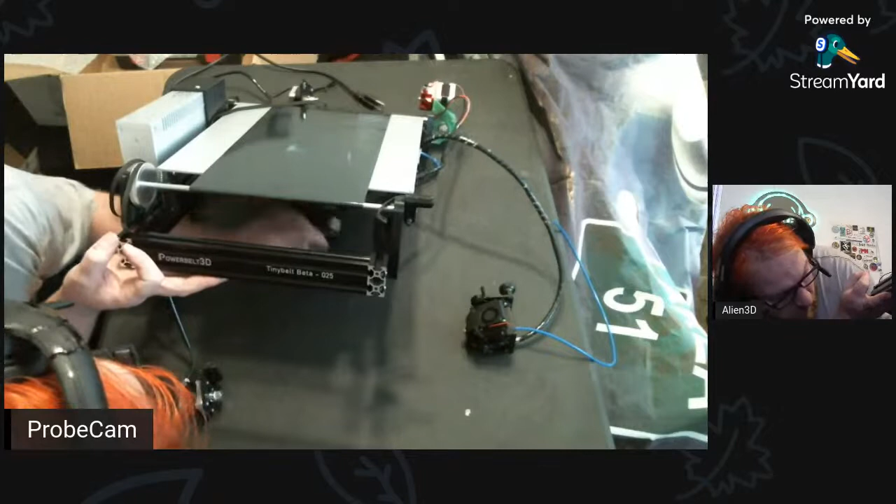There's the USB cable, here's the LCD screen. Is that the nut and bolt I just said I needed and apparently wanted to lose? Alright, where's the... again, I'm guessing this is the cable for the LCD. Oh, my cookies.

Alright, make sure there's no other connectors loose down here. And I have to make sure that I plugged the extruder motor and the Y motor in correctly. Or X motor, is that the X? So it's like X, Z, Y now, right? I'm assuming.

Yeah, Fernando's been kicking ass at the projects for real. I don't know where I'd be without him right now because y'all know I've been stressing and going crazy lately. Oh wait, I gotta rewind the video, he went ahead of me.

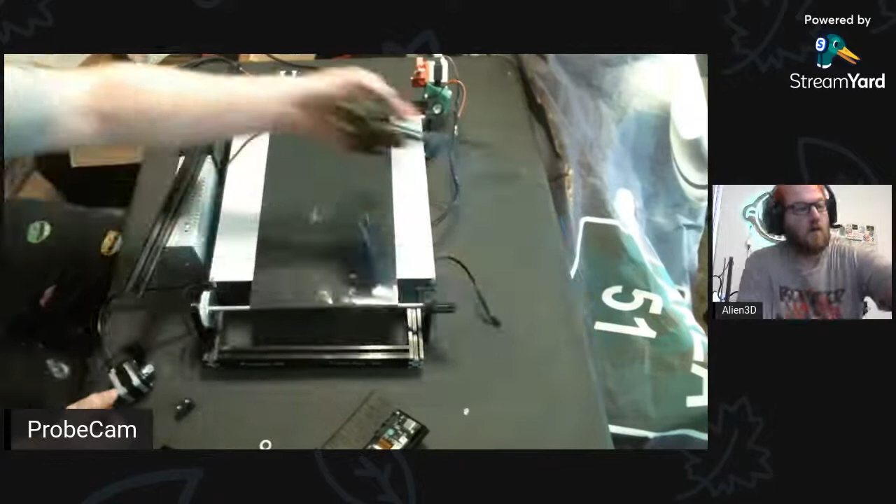So this is a replacement part that I'm including so that if the hotend mount... oh, okay, this is just a replacement part. Don't need that right now then.

So the most complex part of this whole assembly process is going to be our Y-axis, which is also where the hot... I do have a question for y'all, and this is something I brought up to Adam earlier. What's up Raziel, long time no see.

Let me see how he's putting it. Alright, so he's got a couple parts here that the idlers, that the belts idle on, and he's using smooth idlers, which probably isn't a problem to be honest with you, but they're on the teeth side of the belt.

Hey, what's up Rover? Do you guys think... oh man, I'm an idiot, I need a shorter M5 because this is going to be a problem. Do you guys think the teeth side of a belt would cause any artifacts in the prints?

Being on a smooth idler? Because I actually, when I was researching stuff for the Tesseract, I had come across an article that it could possibly put artifacts in the prints, but I don't know. Alright, M5s.

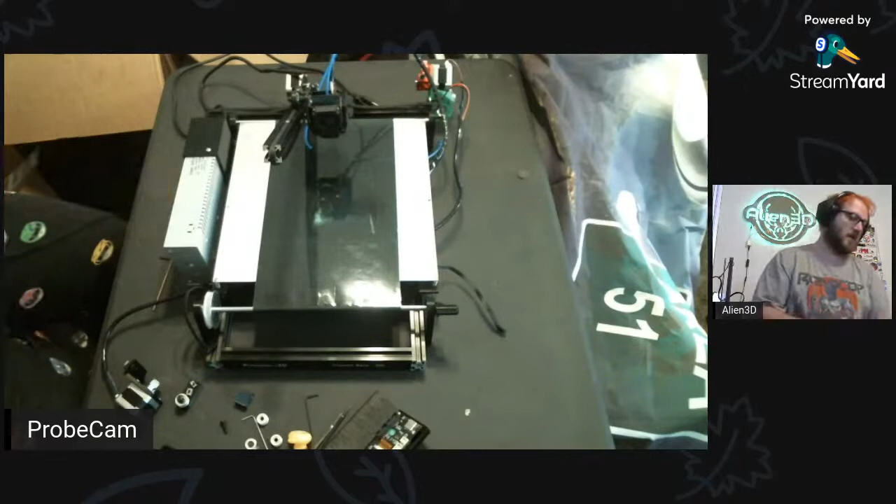I don't... oh well, that should be fine. And I think this goes over here. I don't have enough belt, I'm gonna have to loosen that up to make it.

Adam, I promise I'm watching your instructions, partially. Alright. I'm sure he said in his video how far this is supposed to go down, but I'm a doofus and can't hear.

Oh shoot, I dropped my Allen key, that thing's lost forever now. Is Adam in here? I saw somebody tagged PowerBelt. I found it.

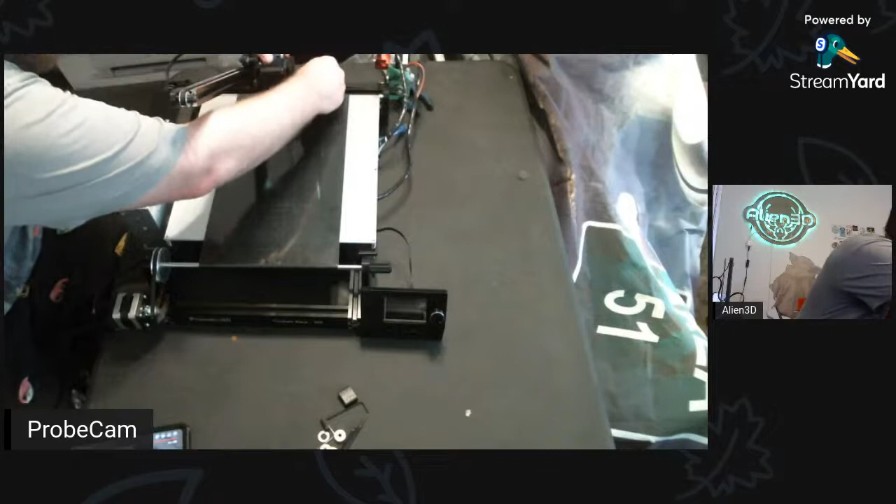Should probably pay attention to this spot. We can move the hot end assembly down to the end stop, and it looks like we're still probably 10 or so millimeters away from touching the conveyor belt, so we'll just repeat this process.

How close am I supposed to be to the belt? Looking pretty good, it looks like it's just barely touching, so we will start there to test prints and probably fine tune it. I can tighten the belt up too, if it's needed.

Booyah, I need power, so much for watching. Thank you so much for making the video, Adam. I had to watch it, otherwise I wouldn't know what the heck I was doing.

Alright, I have a power cord here somewhere. Something's plugged into it though, I can't remember what. Oh yeah, my silhouette. So I tried making stickers for the February UFO myself using the silhouette and my laser printer, and I didn't like how it came out.

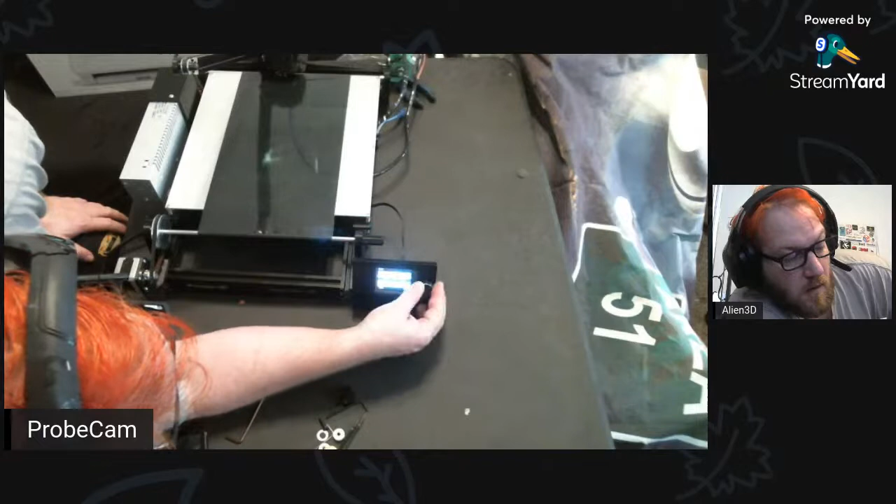Movement. What? Uh-oh. Uh-oh, Biscottio. Well, it hit the end stop, but it didn't stop.

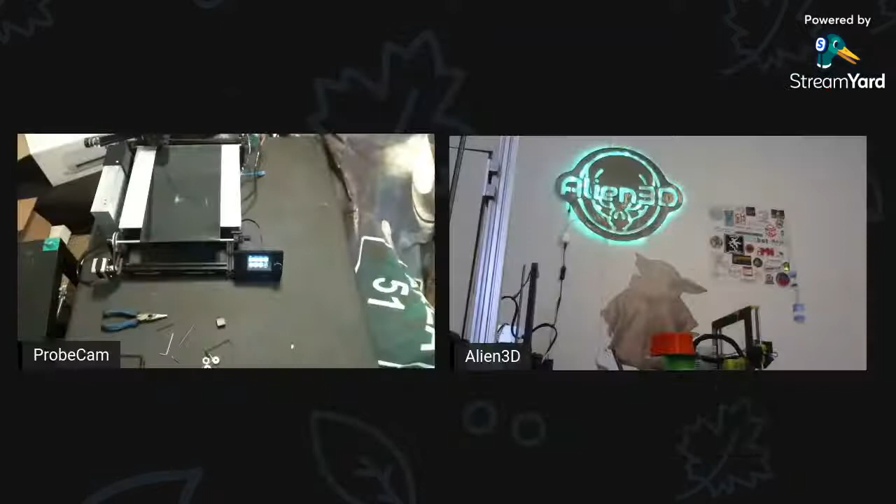Sound good? Sounds good. You want to make the thing go burr? Working on it now. Hey, I'm impressed with myself. I got this thing together and about to print in just over an hour. And a lot of that was just me BSing with y'all, so.

Oh, I need filament. We're gonna do what I do. The only use for my Sidewinder nowadays, I use it as a filament spool holder for my Prusa. Yep.

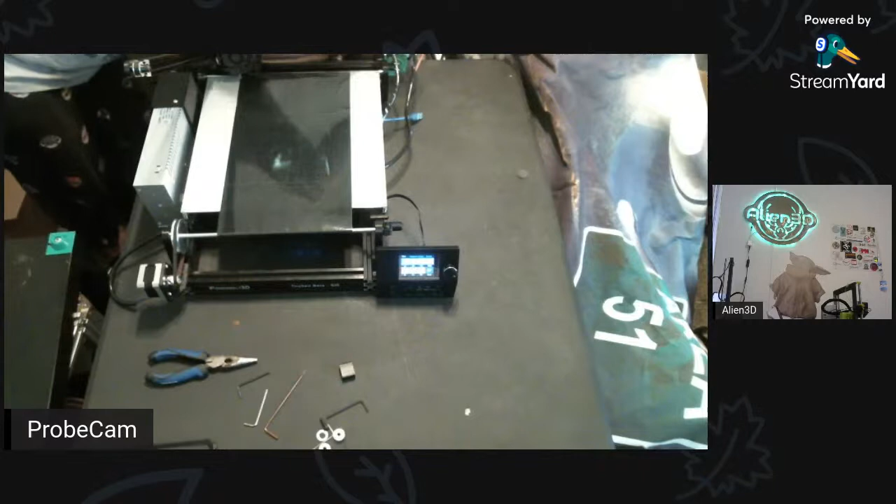Get in the hole, man. Oh shit, I can't see chat now. Hang on, boys and girls. Cap tubes.

Oh, let me go fix chat. What's up, Canadian Maker Project? Yes, I got a PowerBelt.

I shouldn't need my keyboard, but I might need my mouse. We'll see.

Adam's probably like, what the hell did I get myself into with this alien guy? Obviously, you have never seen an alien stream. It's always crazy. All right, let's see. We're gonna move Y.

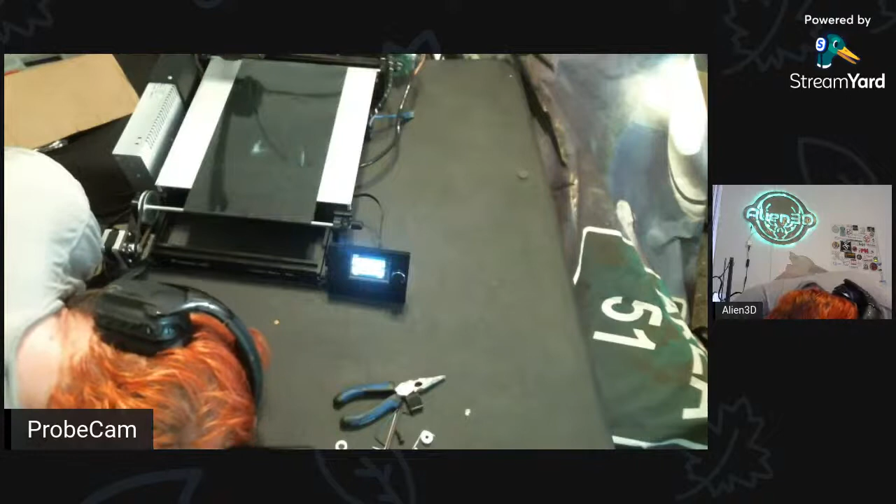Making progress here. This is how I judge printers, how fast their beds heat up. What kind of bed are you using in this? I should have looked. Is it a PCB bed?

I bet it could make pancakes. Yeah, I want pancakes. I think I have some pancake batter actually.

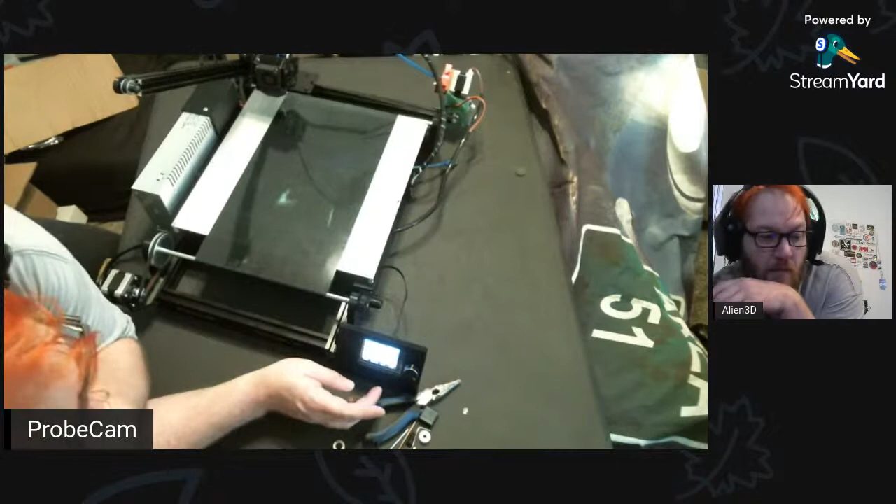Alright, waiting on the bed to heat. Hopefully this G code has home in it. I actually did a test print one time with pre-loaded G code, and it did not home. It started printing in the middle of the air.

Oh, I got PETG spider webs on me. Do do do do do do do.

Y'all excited? We're about to have our first print. And try to get the whole printer in the camera. Doom, doom, doo, doo, doo, doom, doom.

Hey, Vishal. Is that the Vishal from the new filament company, Spark 3D, if I remember correctly? Forgive me if I did not remember that correctly. Sliceworks. Why did I say Spark? Sliceworks. Sheesh. My brain is so fried. I was way off.

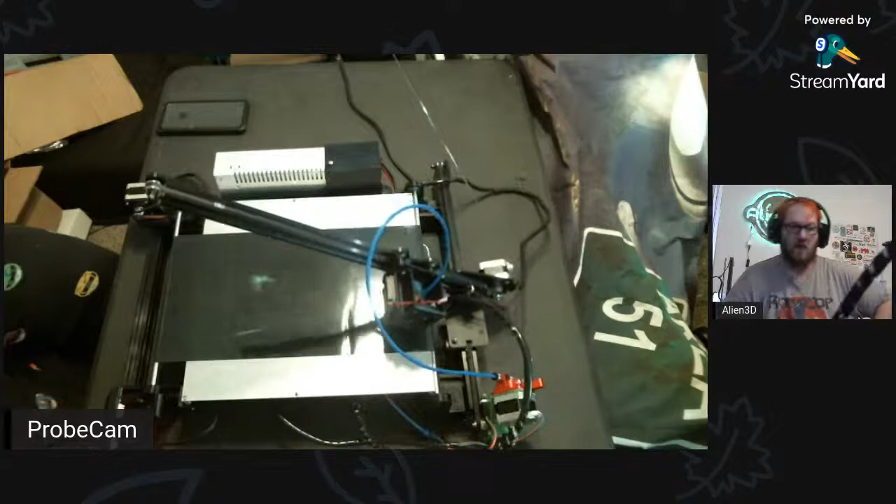Back, back. Yay! Yay! Yay! Now what's it doing? Oh no! That's not gonna work. Stop.

That's definitely not gonna work. We're gonna have to slice. Let's home, back, home, X. What the?

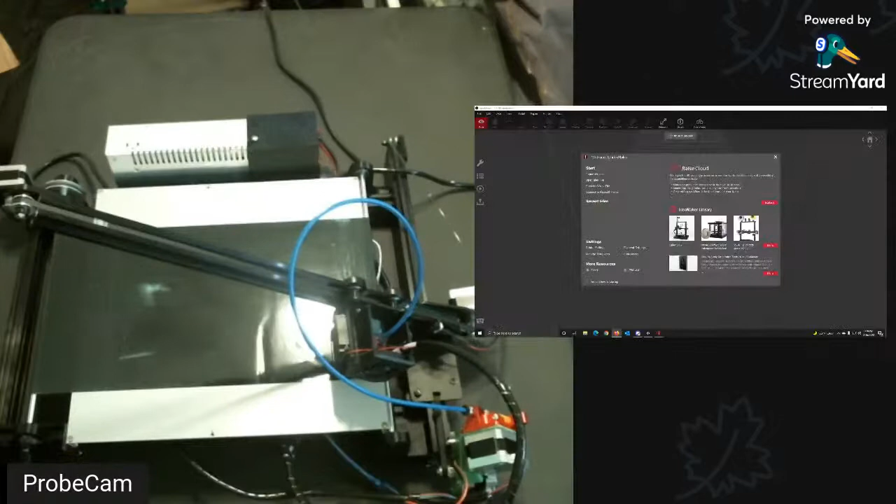No, I'm sorry, the bed wasn't going to 265. The bed was going to 65, but it errored out at 57. And then the pre-sliced G-code for this cube didn't have the start offset correct, so we're going to have to redo this one.

Let's find, anybody know a quick STL that can print fairly quickly? Let's do a quick test cube.

That's kind of cool.

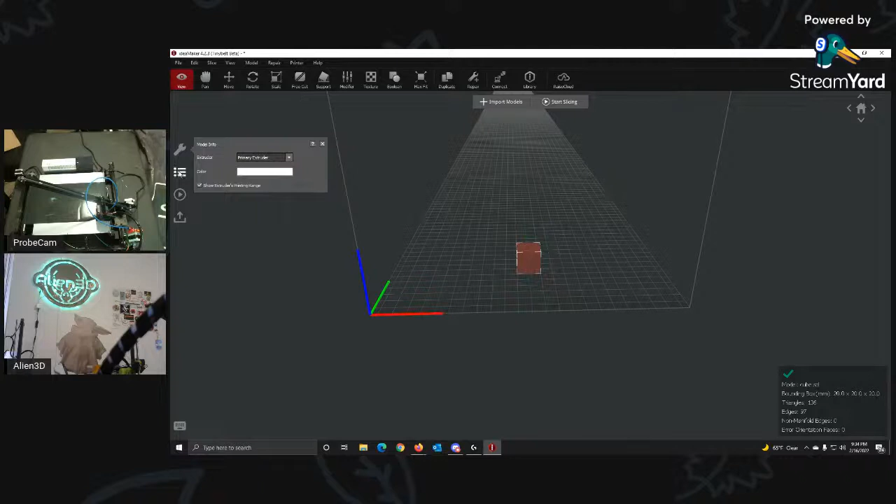All right, extruder, advanced, save. Where is... I just want to put, wait, why can't I move? Does that even matter where that is? Probably not.

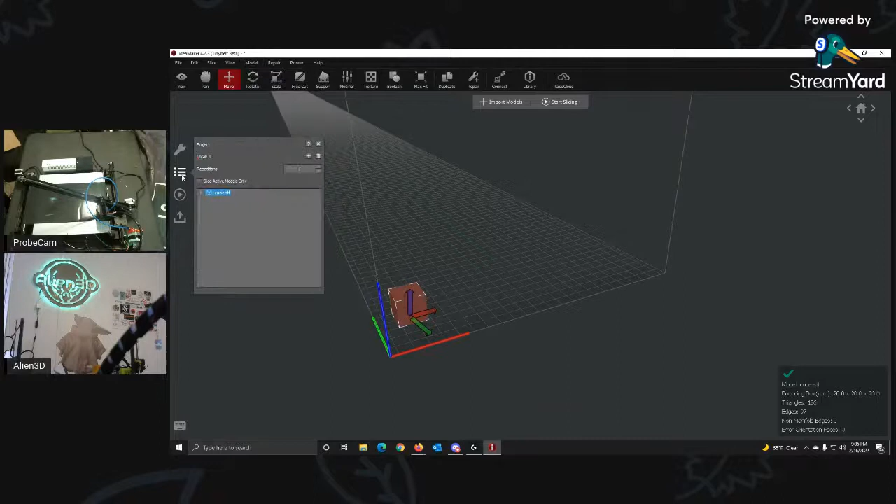Where are the filament settings? When you've been working in Prusa Slicer forever, it's... that's nice, that's nice. Temps.

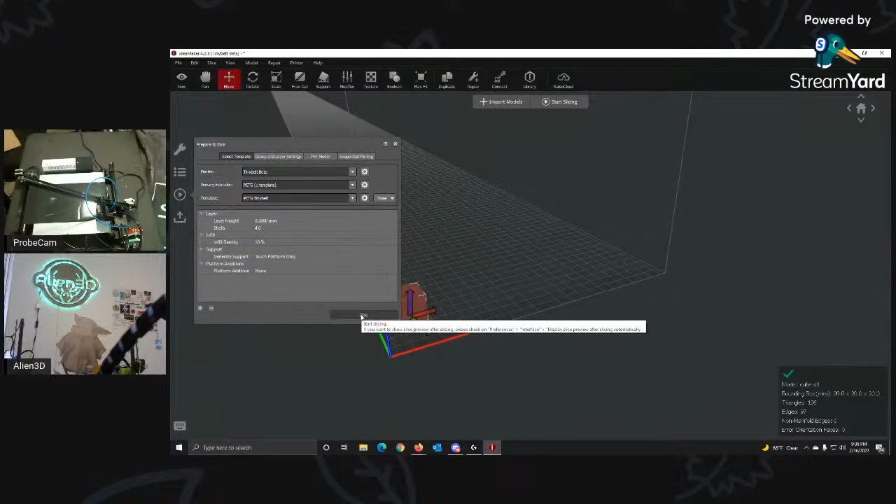Hopefully PETG will print and stick at 50. Eject. All right, let's try this again.

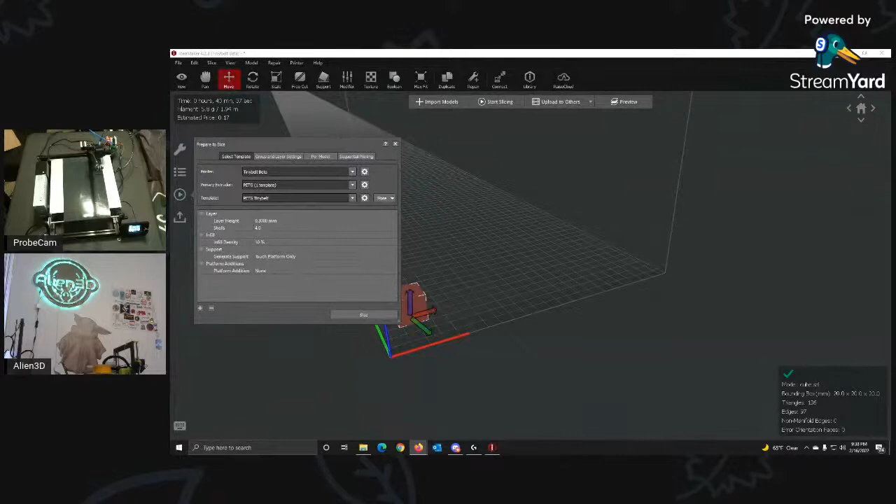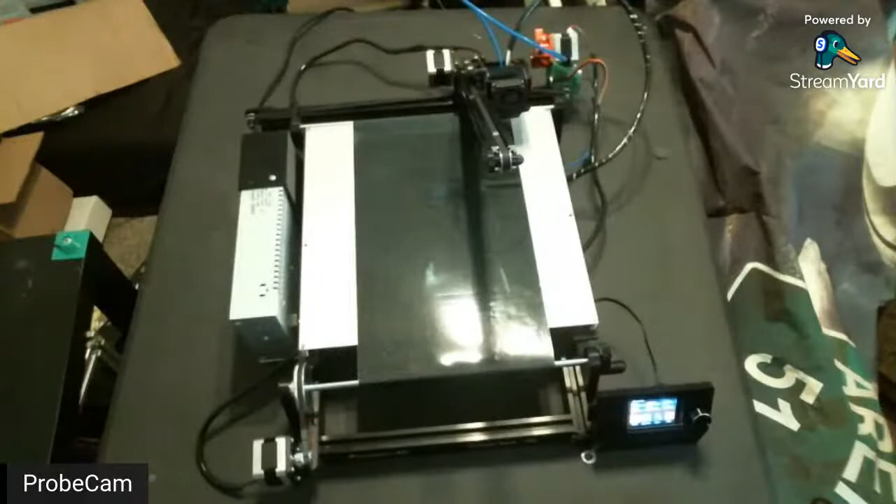Yeah, probably. I'm gonna message him though. I guess theoretically I could move the belt, but that was off kind of far.

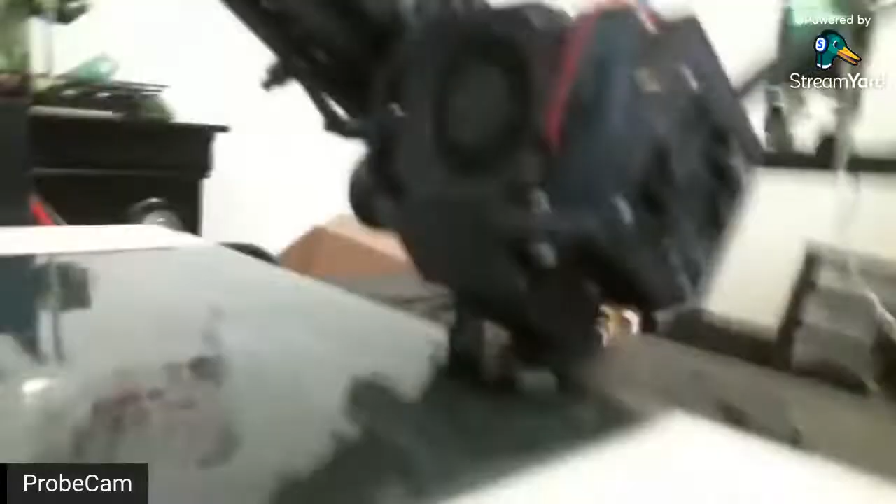I mean, it's possible that it was a nozzle clean. So that's a good possibility. But I like my nozzle cleans being on the bed as well, because otherwise it'll just stick to the nozzle since it's not going to stick to the aluminum. And then it'll cause a booger on the print.

I like that I can... oh, I need to turn off that autofocus. Oh, I don't think I can because I redid my hard drive and I don't think I installed the software. Sorry for the blur, guys and girls and aliens.

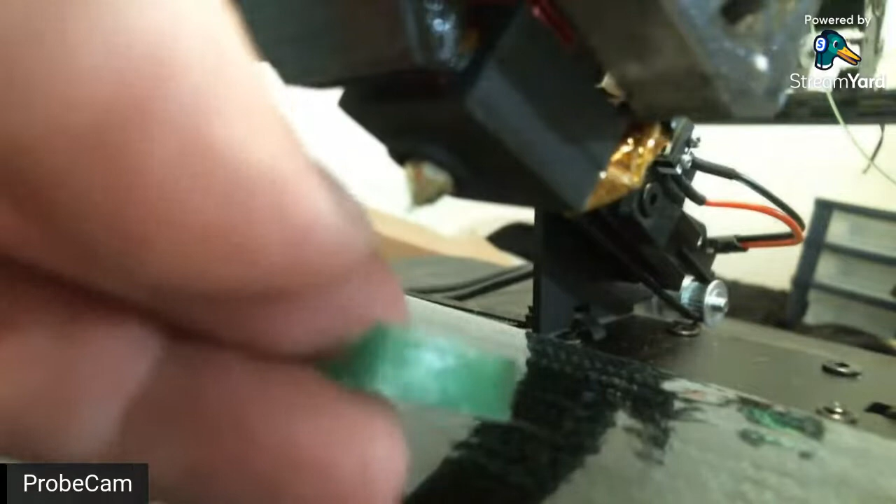We just lost her. Oh, I bet that was the bed's side. What is the... oh, that was the Y. Son of a biscuit, all right.

You're number 2. I don't know who number 1 is.

So I need to either... no, I bet it was the bed temp, because I was printing at 50. Zach, do you have any problems with your bed going over 50? Yeah, I'll have to get a temp gauge. The bed feels evenly hot just from touch because it's all the way to the edge, not just under the belt. But I think it's because I was printing at 50.

Oh, I dropped my camera. You know what? Oh, come on.

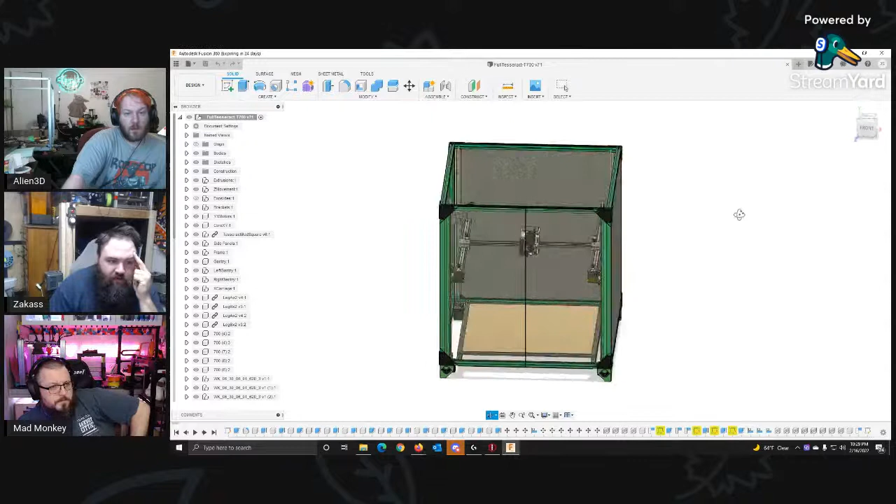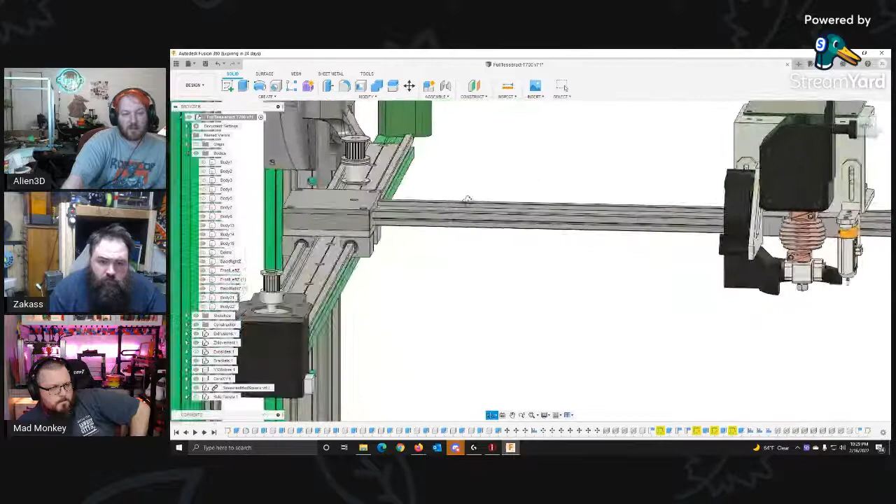So I've been working on one thing, have my hands working on a program for one thing, and then it's like I need this right now, it's like I gotta stop. I so need to organize this some more. But yeah, so I don't have the bracket I was just talking about designed yet because the dude said he was going to do it, and I gave him one of my rails, and I need to get that rail back because these rails are flipping expensive.

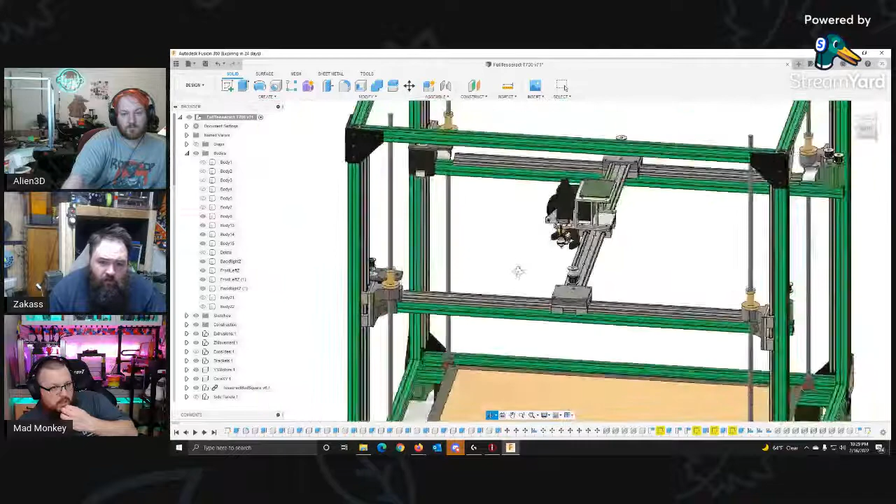If you want to give me a quick and dirty hand sketch of the whole pattern on the bearing and then the whole pattern on the rail, I could sketch it in Fusion in like 3 seconds. I can give you the step file for these bolt patterns, the bolt pattern you need to hold the rail.

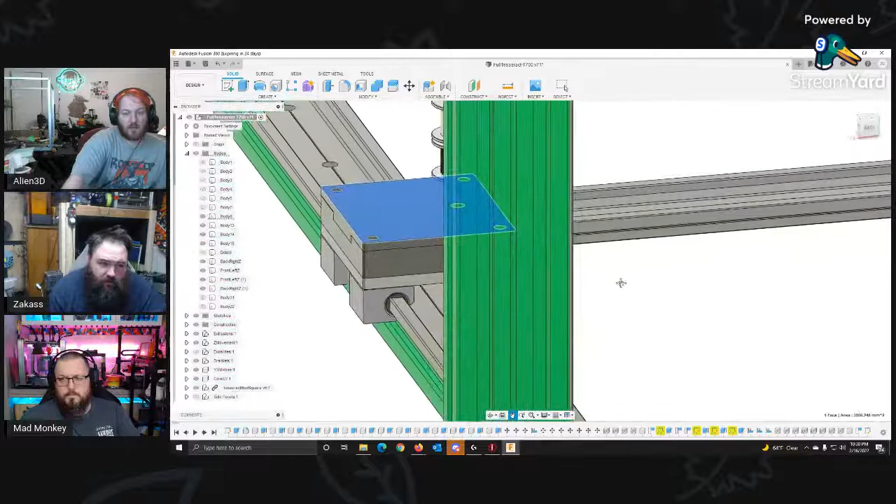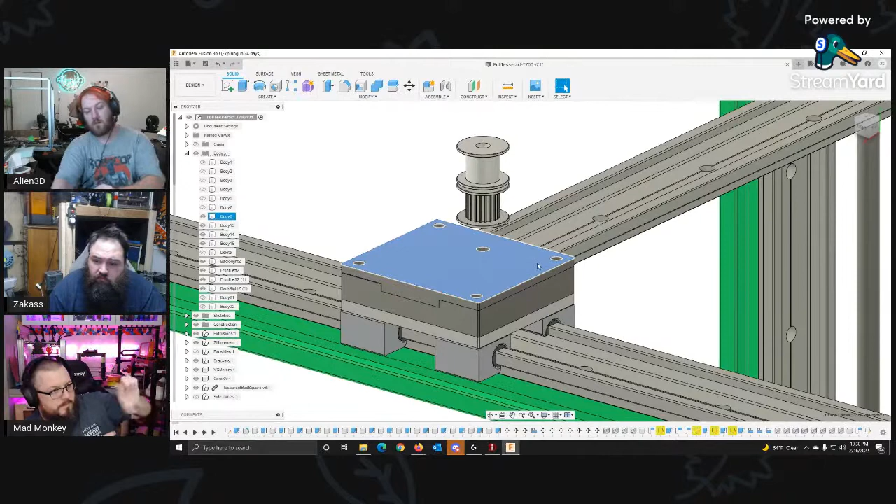The idlers in place - would you do a 3D printed part for the idlers, or do you want to do that in metal? Just do a sheet metal halo, basically like an up and over, something you could bolt through. No, I'm just gonna bolt through with an M5. Oh, I was thinking if you had something over top of it, it would stop it from racking in any way.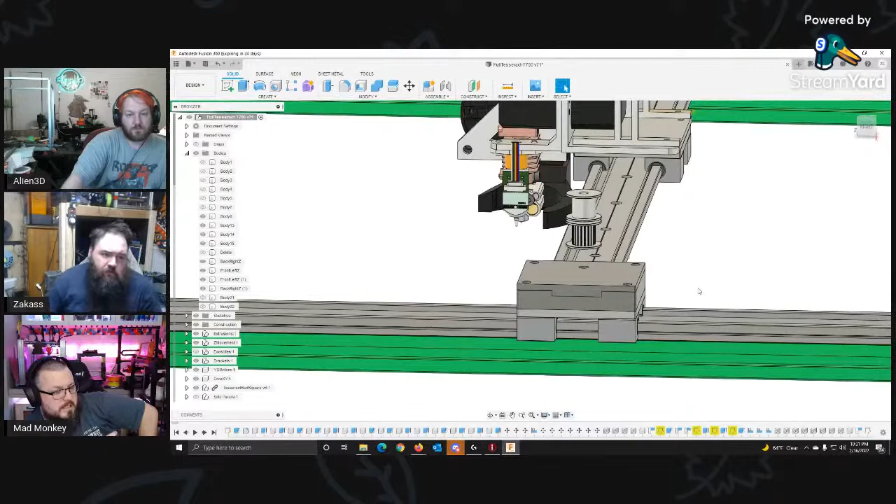I mean, I could do that too. Yeah, but a simple bracket, like a C bracket, bolted down to the other piece, would be easy to make. That would work too. One thing to keep in mind is when you get into bent parts with any of the online order custom parts sites, it gets a little pricey.

I haven't been able to find a place that does bent part stuff because for this I need - Oshcut does bent cuts. Yeah, and I think SendCutSend does too, but it can be pricey, and I feel like the press brakes they have are huge because their minimum radius is very big.

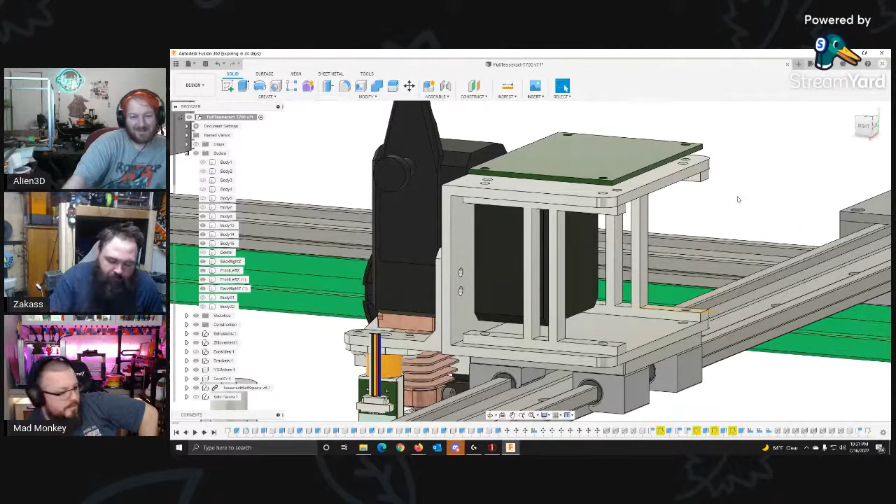The only way I know about Oshcut is from watching some Jerry Rig Everything videos where he's building an electric Humvee, and the stuff he gets put on there - he was saying that the bending and stuff like that's all part of it.

It seems like they've been getting some smaller radius stuff. I gotta test it, it's probably dependent on the thickness of the material you're getting. So you gotta - what's a press brake look like, right?

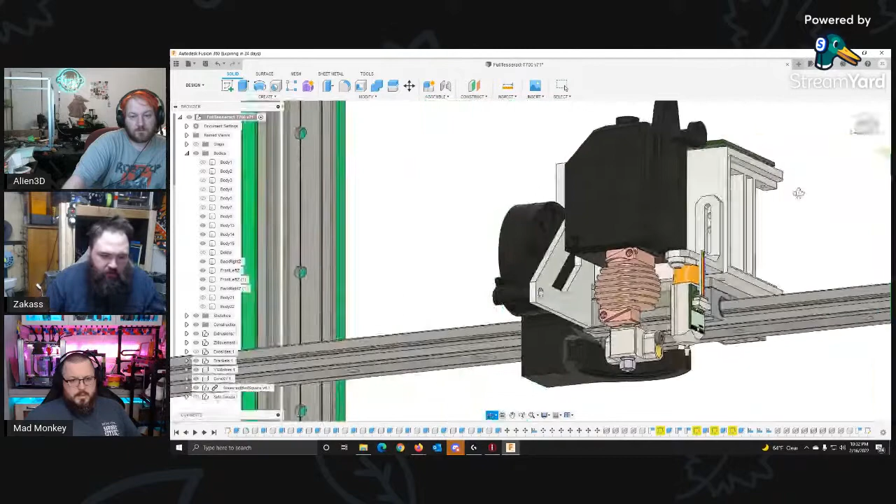Oh yeah, the issue you run into - I used to do HVAC and sheet metal, I've built... when you're on these bigger press brakes doing the bigger materials, you got to worry about your angle, to where if you've got like what you're talking about, a U shape, you can run into clearance issues as it bends. Yeah, you got to worry about it coming back onto itself.

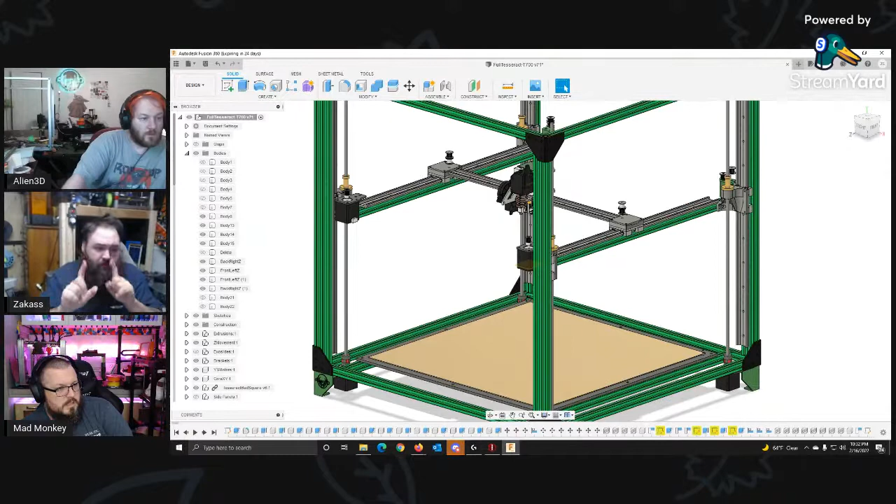For what you're talking about doing, you could just do the M5s into the base plate, and then do either a 3D printed or sheet metal part that's basically just like a dog bone with 2 holes in it. You would put the bolts through it, put the idlers through that, and then screw it down, and you'd have each bolt braced against each other. That would not be expensive to get cut at all, and I think would achieve what you're trying to come up with.

Hang on, I'm gonna go grab another flex plate so I can show Geek Toy Box how big this thing is. Oh well, you don't have enough screen space.

This flex plate's just... I haven't seen it in a while. It's been a while since we've done some live streaming, but it is a big plate.

The only bad thing is FedEx dropped the box, so on every single flex plate there's a dent right here. That would piss me off - did you have insurance on it? I did, but it's too late now. That sucks. Yeah, that's nuts.